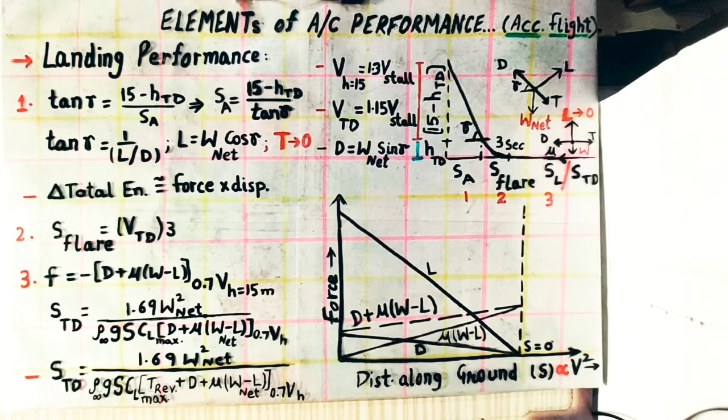So observing this gliding performance, here we have the concentrated mass, on which we have plotted all the aerodynamic forces as we were doing in all our previous cases. Lift perpendicular to the flight path, drag along the flight path and opposite to the direction of flight, and thrust along the direction of flight path at an angle gamma.

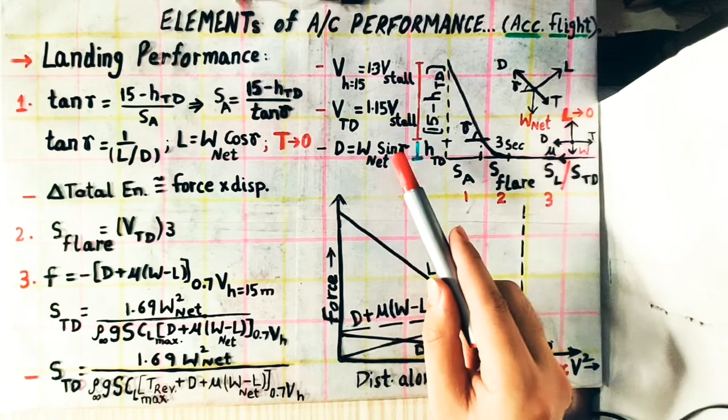Weight always downwards. And point to be noted over here is that fuel weight will keep on decreasing, and we assume that on landing the full weight of the fuel gets consumed, and that's why here we take the net weight of the aircraft from this screening height till this landing. The net weight will be the weight of the aircraft minus weight of fuel.

So observing this aerodynamic and weight forces upon the aircraft, we have tan gamma in terms of aerodynamic forces as we did earlier for the gliding flight, where lift is W net cos gamma, and drag will be W net sin gamma, and the ratio of these two, D by L, will be tan gamma.

If you take this vector and make it a triangle, like the triangle of vectors, then you will see tan gamma is equal to 1 by L by D, and it can be substituted in terms of CL by CD, or you can use it as it is for computing the aerodynamic efficiency or performance parameter of an aircraft, because we know L by D is also a performance parameter of an aircraft.

So we know the screening height is 15 meters, and till this point, HTD, that is touchdown point over the runway, the aircraft will touch down, and this HTD is the height from touchdown to this bar. So 15 minus this height will be this gliding phase, and for this touchdown height we have this flaring distance on the ground.

So here we have SA. As in the takeoff performance, we measured the distance along the ground. Here also we will be measuring the distance along the ground, that is SA for the first phase, the flaring distance on the ground for the second phase, and for the third phase we have the touchdown distance or the landing distance over here.

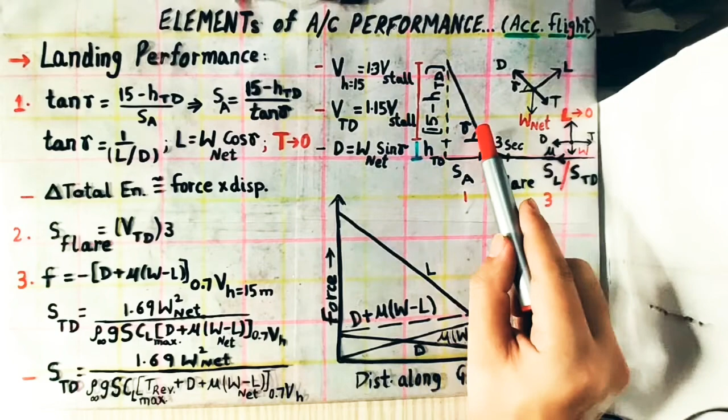So here we have this triangle, upon which we can see that tan gamma is perpendicular, 15 minus HTD, upon base SA. So SA can be computed from this easily. We know tan gamma can be computed from aerodynamic parameters, and SA can be known from these trigonometric relations.

There is another method, that the total energy of the system remains conserved. How we can use this is that we know the kinetic energy and potential energy over here: velocity at the screening height, h equals 15 meters, is 1.3 times V stall. V stall we know is velocity at CL max during a cruise flight, and for that lift is equal to weight, and from there you can calculate V stall, and 1.3 times V stall is the velocity at height equals 15 meters.

And in the book, this velocity at height equals 15 meters is also termed as touchdown velocity, the screening velocity at height equal to 15 meters. But the touchdown velocity is 1.15 times V stall, as done by A.K. Ghosh sir, who has done videos of aircraft performance in IIT Kanpur.

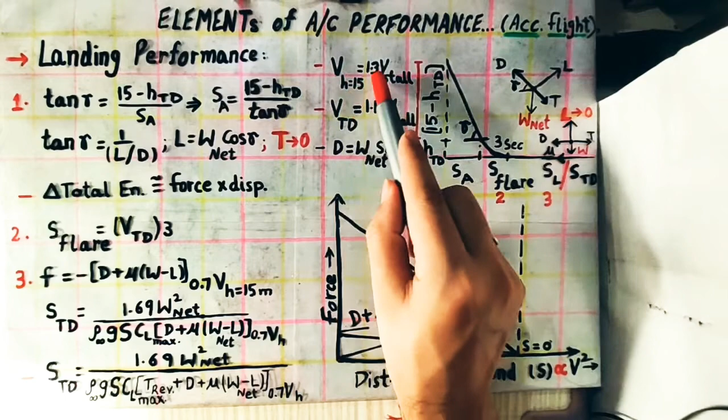So in his videos you will see v touchdown is 1.15 times of v stall, but in the book we are following, the touchdown velocity v at h equals 15 is 1.3 times of v stall. So here, if we see the kinetic energy with this velocity and potential energy with this height, minus the kinetic energy and potential energy at this point, where the potential energy will be 0 but kinetic energy will have some velocity.

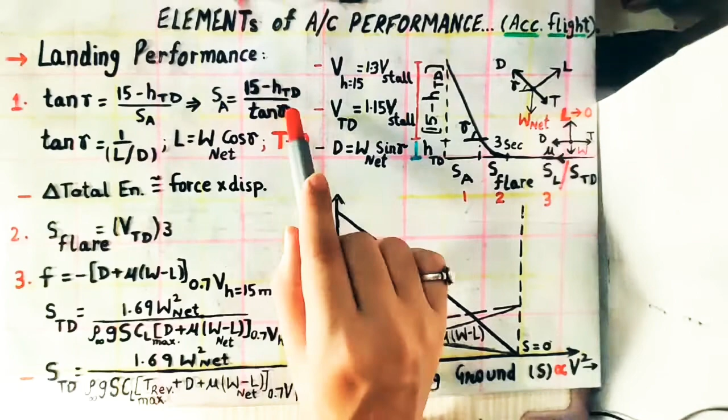Okay, so for velocity you can use this as touchdown velocity. Their difference will give us the amount of work done from this point to this point. That amount of work done can also be converted in terms of force into displacement, because force into displacement is the work done, and from there you can compute the horizontal distance SA. We are not doing it over here, but it is easily computed from this trigonometric relation, so we will not go into this. And moving on to our flaring distance, which is just for 3 seconds.

Okay, so the aircraft was gliding with an angle gamma, and it approaches the ground, flares for 3 seconds and then touches down. So for 3 seconds we assume that its touchdown velocity is 1.3 times of v stall, and then we say that s flare is 3 times the touchdown velocity. Here the touchdown velocity I'm talking about is v at h equals 15, 1.3 times of v stall, so do not confuse it with this touchdown velocity.

Okay, so now let's move on to the third phase. We know for the takeoff performance, the aircraft was accelerating from the start to the takeoff point. And here, from the touchdown point to the end where it will be coming to rest, it will be decelerating. In takeoff it was accelerating, and here it will be decelerating.

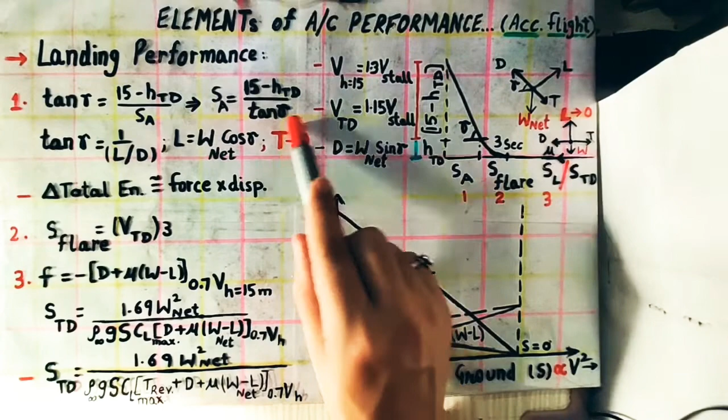One more point I forgot to tell: thrust is assumed to be 0 for this gliding flight. The aircraft we are talking about is not specifically a glider for which thrust is 0, but we are assuming our aircraft is running at the lowest thrust, such that thrust can be assumed to be 0. Gliders can also be powered by engines; it is not necessary that a glider will not have an engine. You can search about that more.

So moving on to this touchdown distance or landing distance, SL or STD. Here you can see that the aircraft will be experiencing lift, thrust, drag, weight along with the friction force mu. And here we can assume lift to be 0, because as the aircraft is approaching the runway, it will have to decelerate and lower its lift so that it could land, and on that basis we can assume that lift is equal to 0 or tending to 0 in the expression we will be covering now.

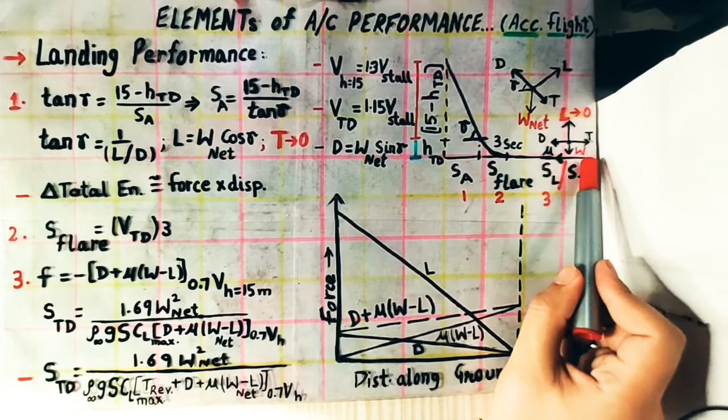So now moving on to this decelerating force from the touchdown point till the end. Its deceleration is varying from touchdown to the stopping point. Just like the takeoff performance, where we took an average at 0.7 times of takeoff velocity, here we are taking the average deceleration at 0.7 times of touchdown velocity. If it is given in the question that there is some lift, then you have to put the value of lift, otherwise you will assume lift to be 0.

So lift and drag will be computed at 0.7 times of the touchdown velocity for the ground distance for landing. It's a deceleration, therefore we have a minus sign over here. The aircraft will be moving in the forward direction, and thrust, as I said, can be assumed to be 0 for the whole flight.

So here thrust tends to 0, and the decelerating force is minus, D plus mu times W minus L. The minus sign is taken common over here, and D plus mu times W minus L, because the normal force will create a reaction of this friction. So this frictional force is mu times W minus L, which is added with the drag in the direction of drag.

And just like we know force is equal to mass into acceleration, here we know force is mass into deceleration. And from Newton's laws of motion, we know v square minus u square equals 2as. We know v is 0 over here, and s here will come out to be minus of some value. So upon using the acceleration value from F equals ma, the deceleration was taken as an average for velocity 0.7 times of v touchdown, and this acceleration value is then substituted into v square minus u square equals 2as.

Just like we did for the takeoff performance, we have done over here. You can look at the takeoff performance video and observe what could be done to reach this formula. The point to be noted here is that weight will be the net weight. Here also weight will be the net weight of the aircraft.

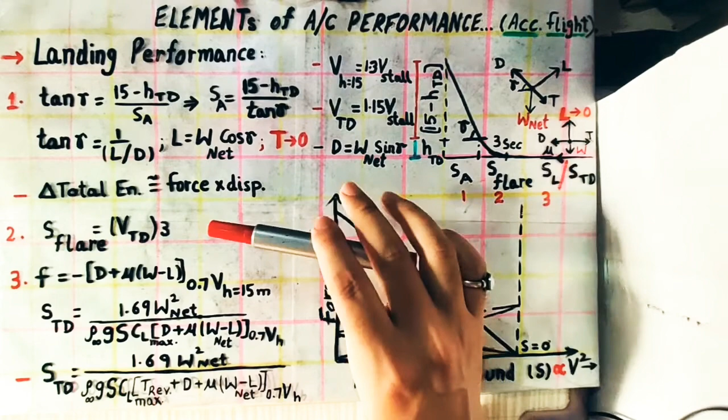The thrust which is decelerating the aircraft is known as thrust reversal, represented by T_REV over here. So it will be added to the drag and friction, as you can see, and the rest remains the same. For touchdown distance, STD is equal to 1.69 times W net square divided by rho infinity g S, same planform area of wing, CL max, whole multiplied by thrust reversal plus drag plus mu times W net minus L at 0.7 times V h. This means 0.7 times V h will be used for thrust reversal as well.

So with this the formula has been done, but as we did for the takeoff performance, we observed the force variation with v square along the ground. From touchdown to the stopping point, or resting point, we know lift keeps on decreasing till the aircraft stops, and drag keeps on decreasing because drag is also a function of velocity. Lift and drag are parabolic functions of velocity; they are directly proportional to v square.

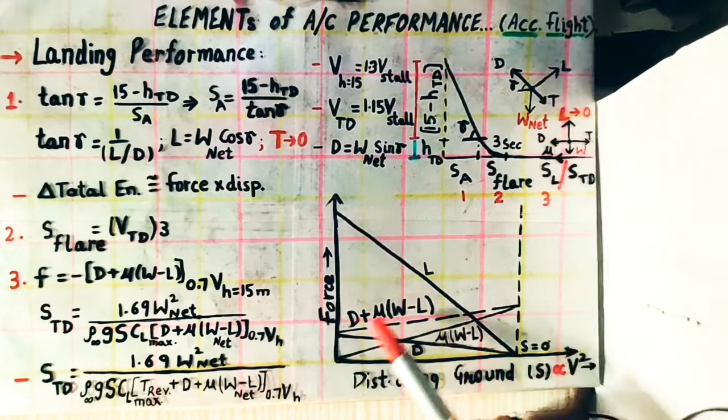And since we are observing lift and drag with respect to v square, not v, here we have linear variations for lift and drag which are decreasing. Lift will be decreasing at a much higher rate compared to the drag. Just like lift increases at a higher rate with increasing velocity, whereas drag increases at a lower rate. So lift will be decreasing at a higher rate and drag will be decreasing at a lower rate.

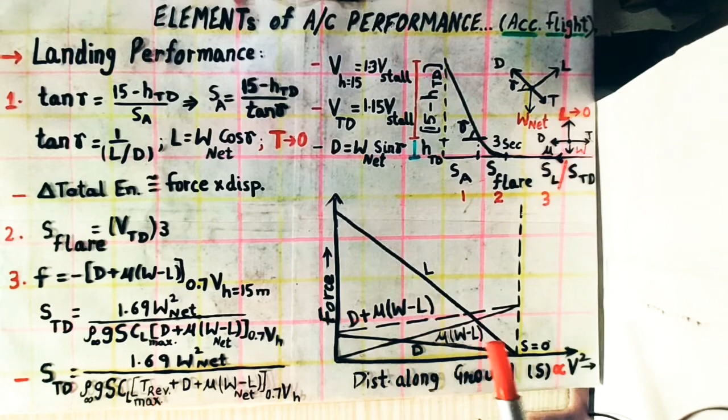And since friction is computed as mu times W minus L, the effective weight will be increasing because the lift is decreasing, so the friction will keep on increasing. So here we have mu times W minus L, which will be increasing. So the net effect of drag and friction is an increase of this backward force acting on the aircraft, that is drag plus mu times W minus L.